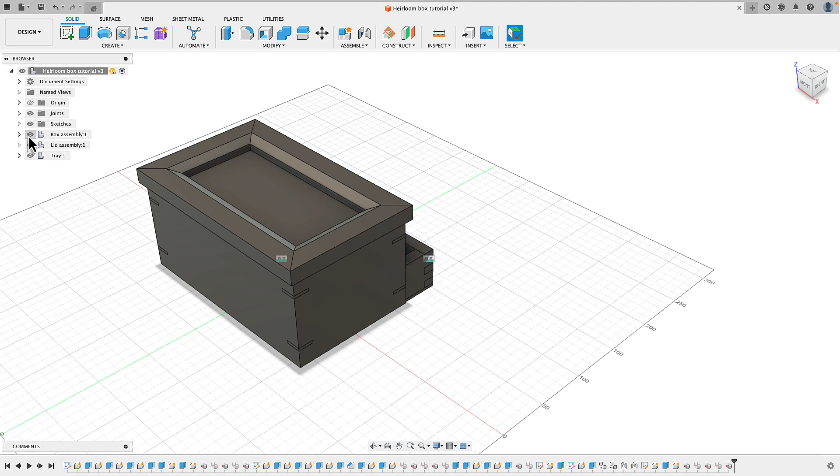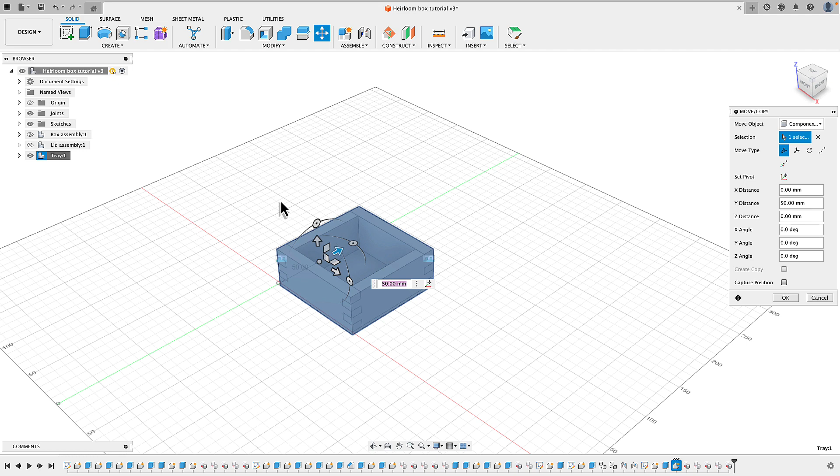So to make things easier, we'll just turn our box and our lid off. Generally a quick way of doing this, if we just select the assembly and then we can just move it. And we've got a little bit of a problem here. Normally that should be moving, but we might have a little bit of a problem with the way the joints are set up. So if you find that you can grab an arrow and it moves, you don't have this problem. But in any case, I'm just going to show you how to solve it if you do.

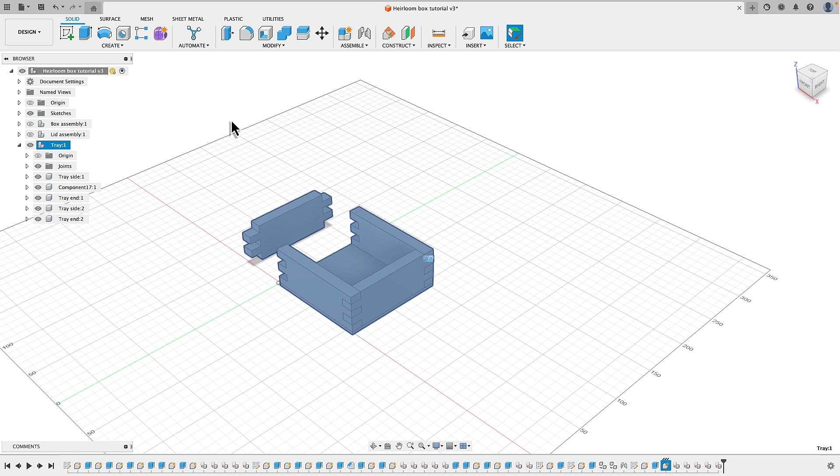So if we look at our tray subassembly, one of the joints, you can see it's this one here, is in our tray subassembly. But if we look up here to our master assembly, we can see that this other joint is up here. So probably to do it most easily, all we need to do is right click, we can just delete that joint and then select our tray, and we're just going to make that joint again. So keyboard shortcut letter J, and we can just come into that corner there, that corner there. Okay. And if we have a look, we can actually see now both of our joints are sitting inside our subassembly.

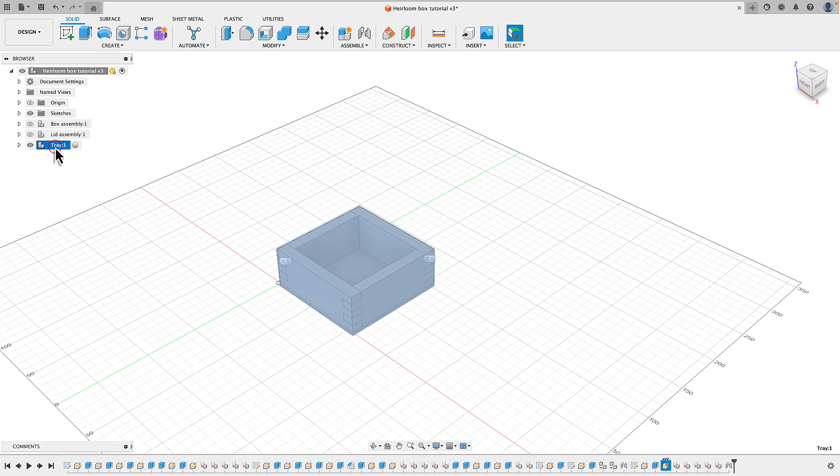So we'll close that up, select that, right click, move, and we're just going to move it out of the way a little bit. Okay. Then we can just turn everything else on, and we've got them separated for our next operation.

Up to this stage, whenever we've done any joining operations, we've been joining components to components. But now we're going to start joining subassemblies to subassemblies, and it just introduces a few things we've got to consider. And just to show you, I'll demonstrate what can happen.

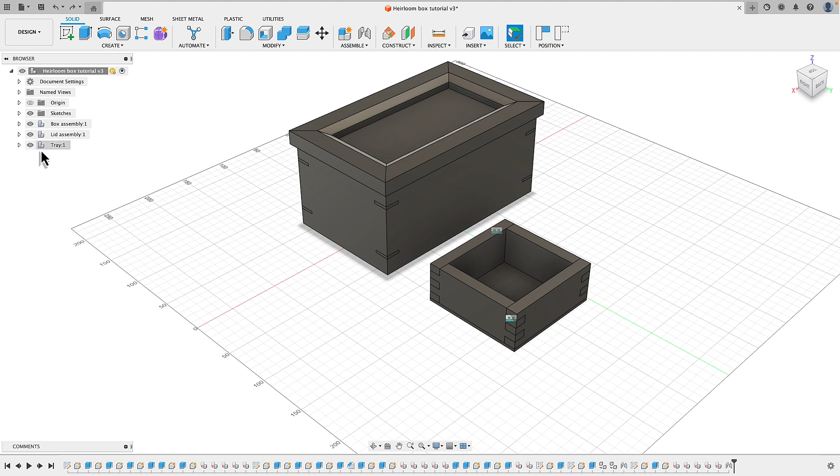So I'm just going to turn the lid assembly off because it's not relevant for this one. J for join, and I'm going to join this corner of the sliding tray to this corner of the box. Now if I press OK, you can see some funny things have happened there. So I'm just going to undo that and just show you another sort of step that we can undertake before we do that.

So the first thing we can do is we'll select the box assembly, right click on it, and we'll turn it into a rigid group. So it kind of will now treat this as all of these components being together. As you can see in the summary there, they're treated as a single object when moved or when joints are applied. So we'll turn that into a rigid group.

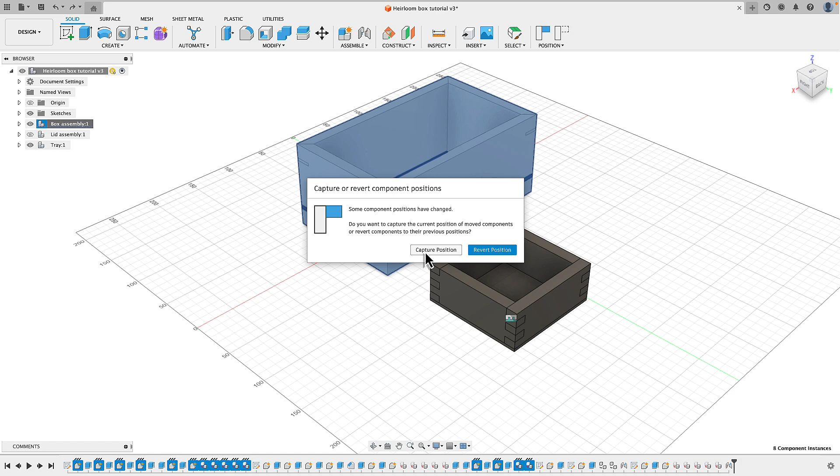You might get this warning here. In this case, we're happy with the position of everything, so we'll just go with capture position. And then we'll go OK. So same with the lid, we'll select it, right click, rigid group. OK. And then with the tray, same again, rigid group.

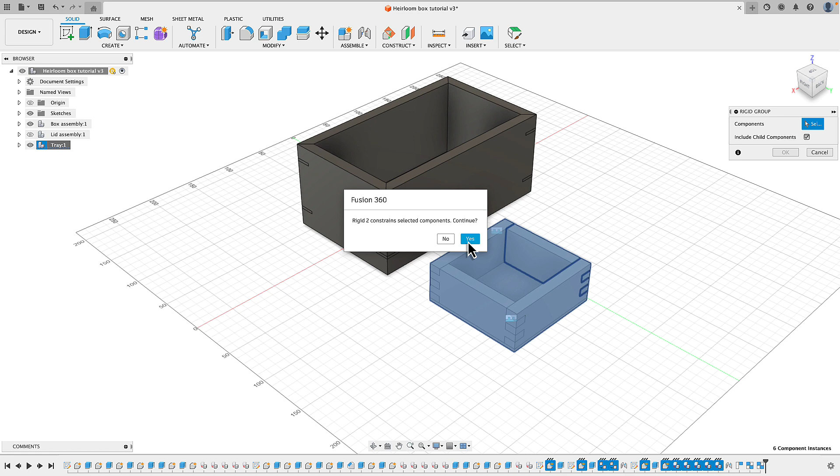Now because we've moved it, it might give us some warnings. So we'll just say yes there. And we're pretty happy now.

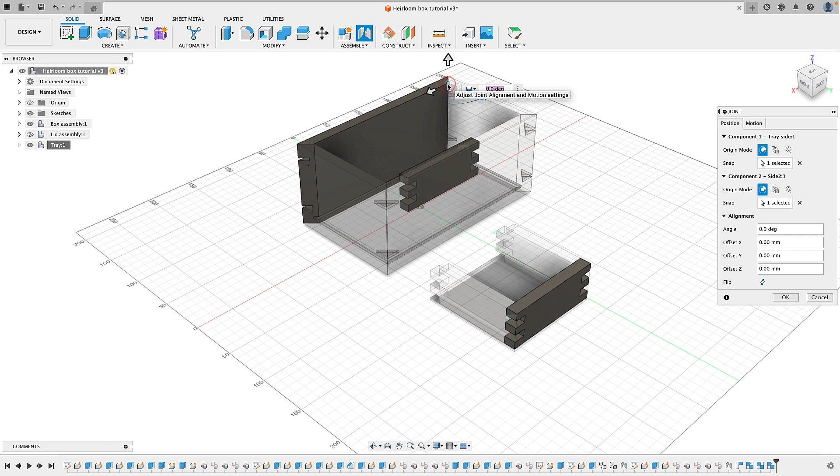So in terms of the joint, what we'll do is I'm going to start by creating a very simple joint, and then we're going to modify it later to animate it. So J for joint, I'm going to join, as before, this corner here to this corner here. Now you can see it's looking a little bit funny at the moment, but don't worry. And we'll go OK. So you can see everything's moved into that place there.

Before we modify the joint, we want to work out how far the sliding tray can actually slide. So we can use the inspect tool just to measure. So I just want to go from that corner of the box there down to this corner here, and you can see that that's 90 millimeters. So that gives us some information that's relevant.

Now to modify an existing joint, we can just select it. Now if you can't see that there, it might mean that joints is actually suppressed. So we can just select it, right click, edit the joint.

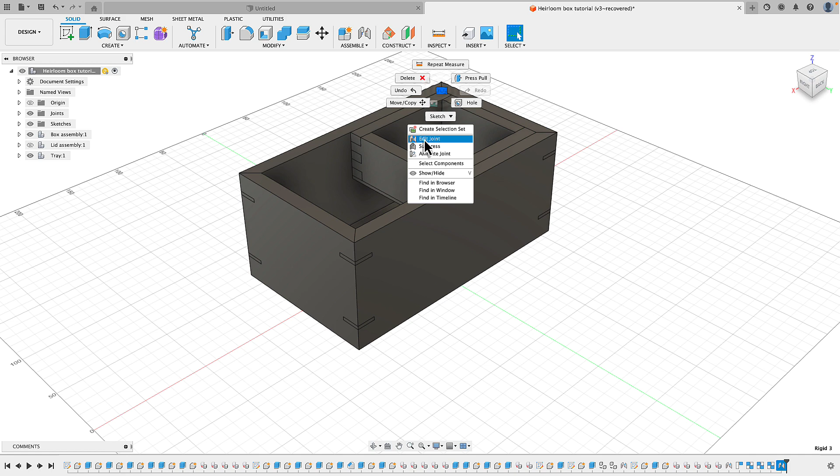So the first thing we want to do is set up the motion. The way we set it up the first time, it's a rigid joint, but we can select this and see the different kinds of joints available. We're going to have a slider joint because we want to slide a component along a single axis.

So we'll select that and you can see it's animating already, but it's going the wrong way because it's defaulting to the Z axis. So we can just check to make sure what axis we want. It looks like the X axis. Okay, so we've now got that.

Now in terms of motion limits, well that's our start point, so we'll have our minimum set to 0. But our maximum, we've already found that out, we'll set it to 90. And you can see that it's showing us where it's going to stop, which is exactly in the right spot. So now we can go OK.

So theoretically we should be able to slide this, but we've got a problem, and the problem is that nothing is grounded. So basically, because there is a joint relationship with the box, everything moves. So all we've got to do, and this is a pretty standard thing, is select the box assembly, right click on it, and we'll ground the box assembly.

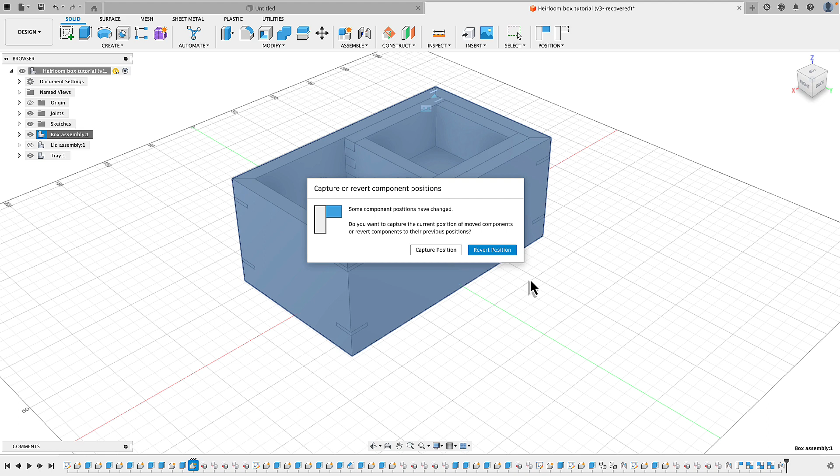Now we did move some things a little bit there, so we might as well go revert position. So we've gone exactly back to where we were. Now if I click away, and if I select any part of the tray, you can see that it slides up and down exactly where we want it to slide.

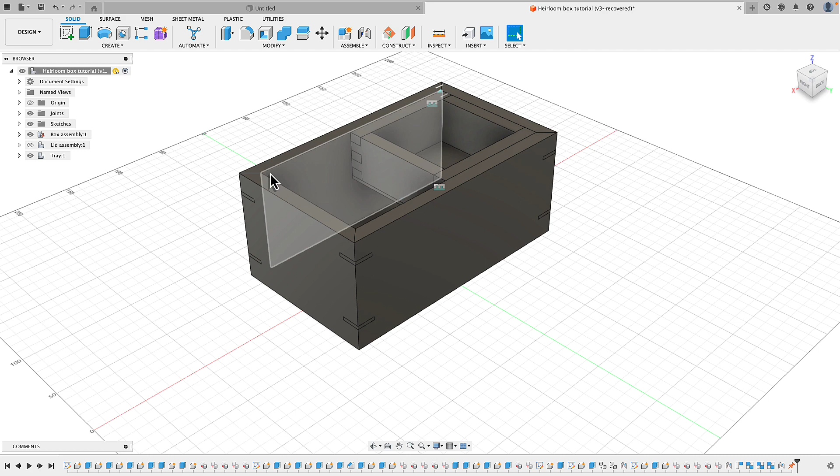Now we've got that done, there's just one other modification we need to make here. When I attach my lid, I'm not going to hinge it to the box. Basically what I'm going to do is on the underside of my lid, create a sleeve, or put an extra piece of material that has a thickness, but one that sits inside this space here.

But the problem is that it will interfere with the sliding tray, or the sliding tray will interfere with the sleeve. So all I have to do is, again, you can see the joint icon has changed because now it's showing that it's not a rigid mate, but it's actually a sliding joint.

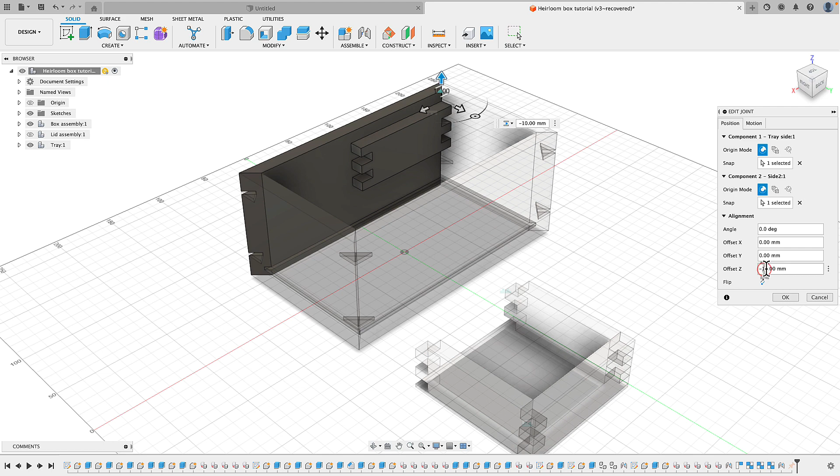So I'm just going to select it as we did before, right click, edit it. And the only other thing I'm going to do now is offset it on the Z axis. I could do some sort of variation up here, but what I'm going to do is down here, make that -3. And then OK. So you can see now it's set 3 millimeters down from the top. And as before, I can still slide it in that space.

Now you may have noticed that although we're nearly complete, we're not quite there yet. You can see we've got our nice sliding animation here, but the reality is that our sliding tray, there's nothing actually to support it. So in the real world, I get the students to create a little sleeve that just sits on the inside faces so that the tray actually has something to support it.

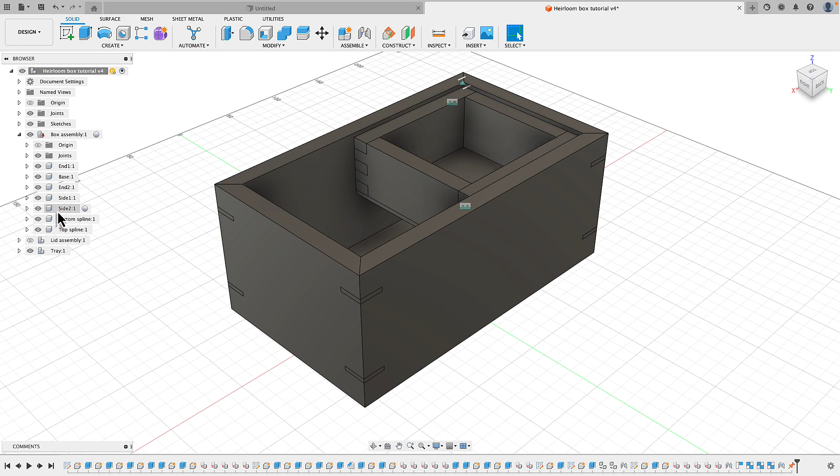So we'll create that now. Before we do, we'll start by hiding some things. We'll open up box assembly, and I just want to hide this side facing me because it gets in the way. Then we're going to use our inspect tool to measure, and we want to go from this bottom corner here of the sliding tray down to this line here and work out what that is.

So we've got 41 millimeters there, so we just need to remember that. Okay, so we'll keep hiding things. We'll hide our splines and our ends because they'll get in the way, and we might as well hide our tray as well.

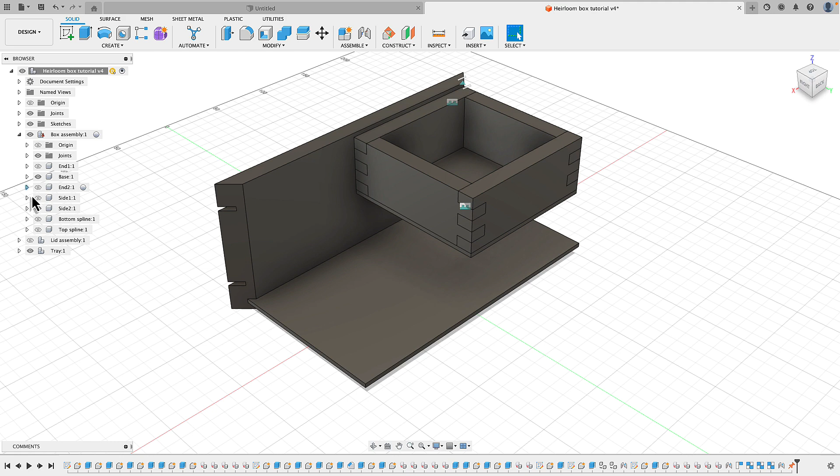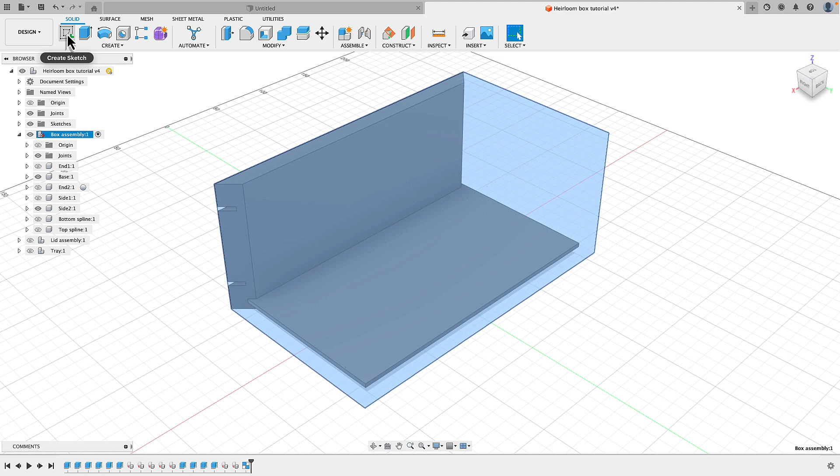So we're going to create a new sketch, and it's going to come off this face here. Now what I'll do, just so I can get everything in the right place, I'm going to select this box assembly here and press that particular setting to have this turned on. So new sketch, we're going to sketch off this inside face, R for rectangle, and I just need to go from that corner there and across. Now the bottom dimension of 196 millimeters is exactly what we want.

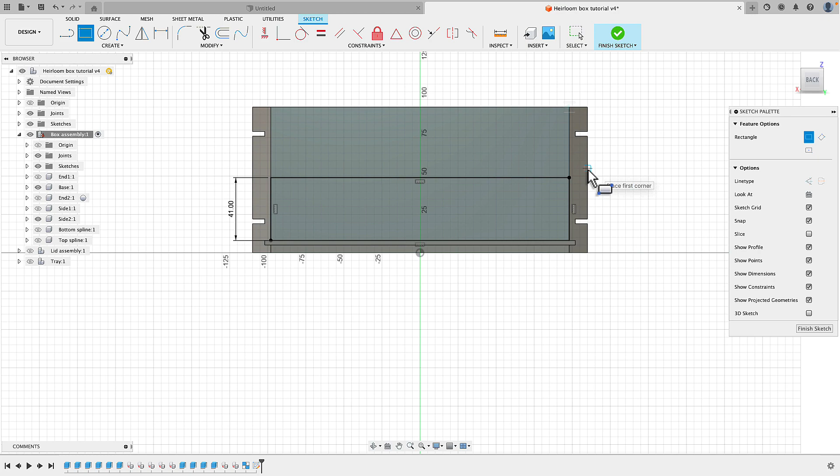It's this other dimension that we need to edit to 41, which is what we had before. Make sure that snaps to 196, and there we go. We can finish the sketch. So now we need to extrude it.

And so we'll come out this way. We need to come out 3 millimeters, and we need it to be a new component. And then we go OK. You can see the component has turned up down here in our box assembly. So we might as well give it a name, and we'll just call it tray support.

Now obviously we need another one. If you remember right back at the beginning when we first set this up, I started drawing it out using a center point rectangle. One of the benefits of it is we're going to see that right now because we're going to create a new tray support just by using the mirror function.

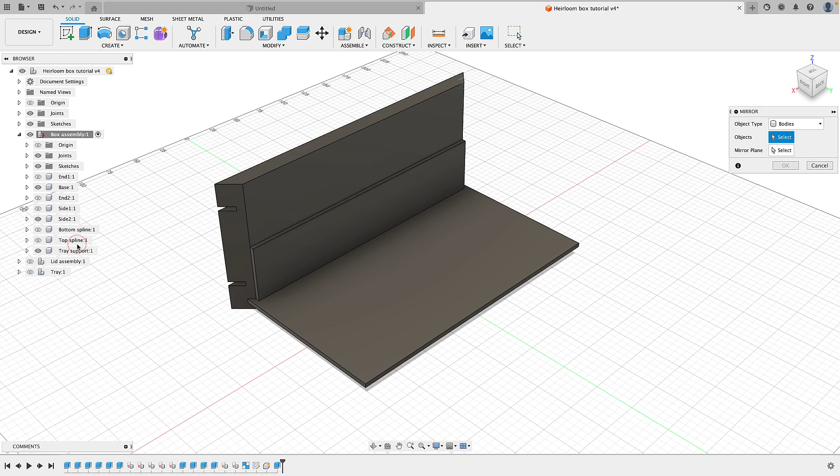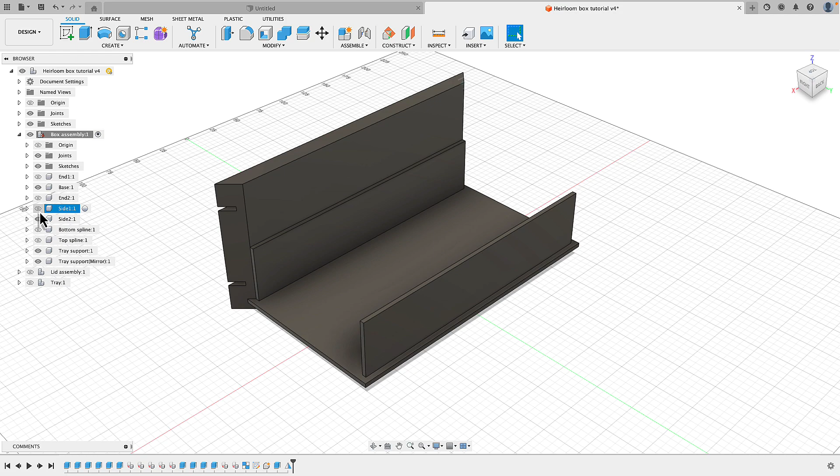So we'll go create, mirror. Object type is going to be components. We'll select that component, and our mirror plane is going to be one of our 3 original surfaces from our original origin here. So we've got that, and you can see that appears. We'll go OK. And then just to prove that it's worked, if I turn the other side on and orbit around, you can see it's in exactly the right place.

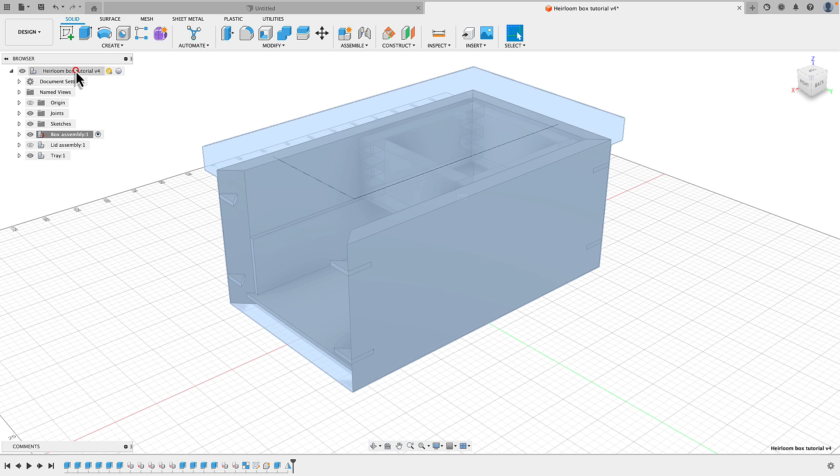Okay, so now we effectively have everything complete for our box. So we'll turn everything on, and we'll turn our tray on as well. We'll go back up and just have our overall project selected. Now we can just see that our tray is sliding on our little supports there.

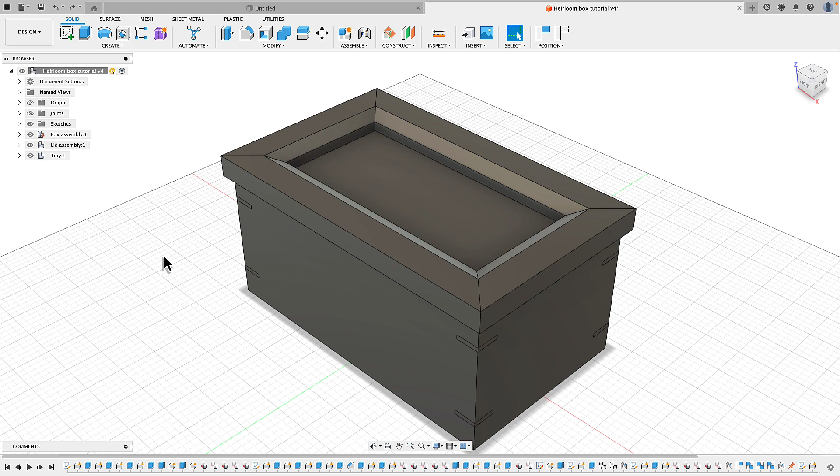One final thing before we finish this tutorial is I'm going to show you just how to make the box look a bit more realistic. So what we'll do is I'll select the box assembly and we'll open it up, and I'll just select the side facing us just to start off with. Now if I right click on that, you can see a couple of different features here.

You can add a physical material to it, and that's quite useful, particularly if you want to do any engineering functions, because not only does it make it look like that material, but it also assigns properties to it as well. Now in this case, it's not really necessary, so we can use the appearance function, and you'll see something like this come up over to the side.

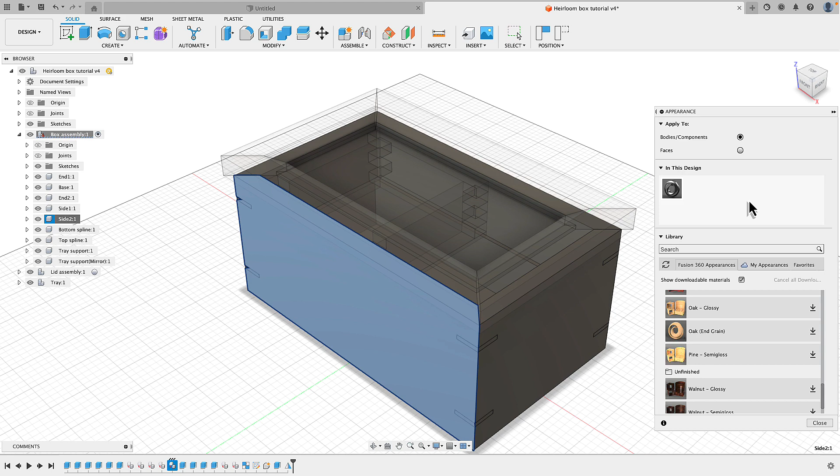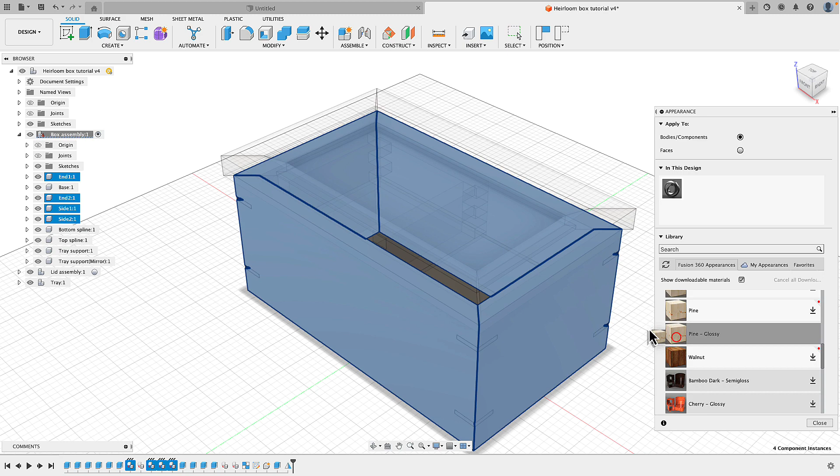But what I'm going to do is just select as well, for this one, everything that I'm going to give the same material to. In this case, it'll just be the sides of the box. I've already opened this up before, but you'll see this menu here, and at the bottom you'll see wood. So you can click on that, open it up, and I'll start off with maybe pine glossy, a good one. I'll select that, and I can just drag it onto the box, and you can see that appear there.

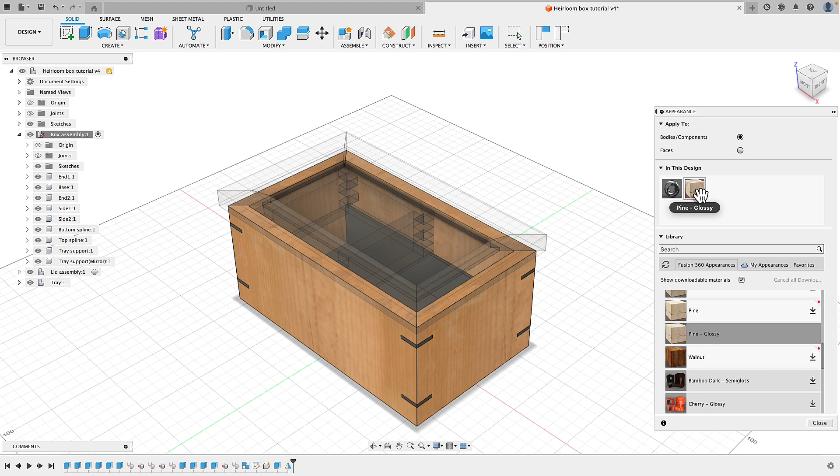Now you might look at that - there is something I don't particularly like, and that's the grain direction, because it's not realistic. In the real world, that's not the way the grain would go. So just to show you what you can do, if you then select it up here, because we've now dragged it onto our model, it'll appear up here. So if we select that, right click on it, edit it, this will come up.

Now the first thing that we can do is change the rotation, so we can fix that problem pretty much straight up. So there you go, now we've got the grain going the right way, and you can play around with some of these other features here.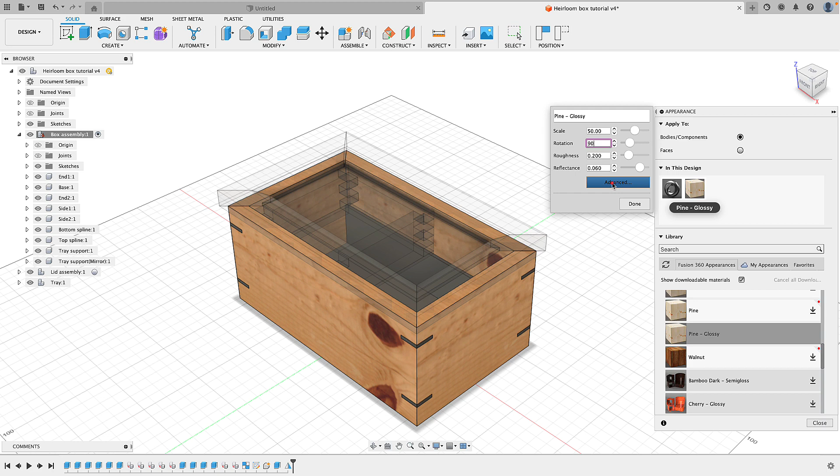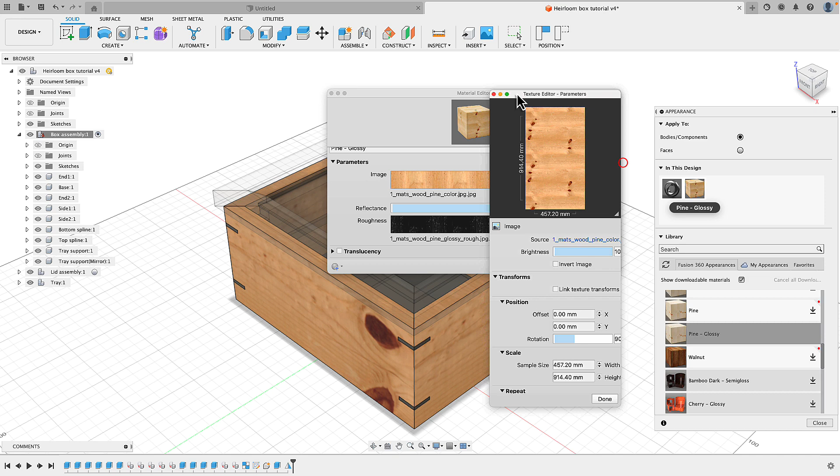But now what's happened is I've got these really big knots in my image, and I'm not a massive fan of that. So I can then go into advanced, and I'll just move this over and widen this out a bit. You can see we've got the image that comes in, and there's some other features here as well. But what I'm going to do is on the image, just hovering over here, I'm going to edit the image, and I'm going to play around - again, these menus don't really open up fully, but if I get in here, I can keep playing around with things.

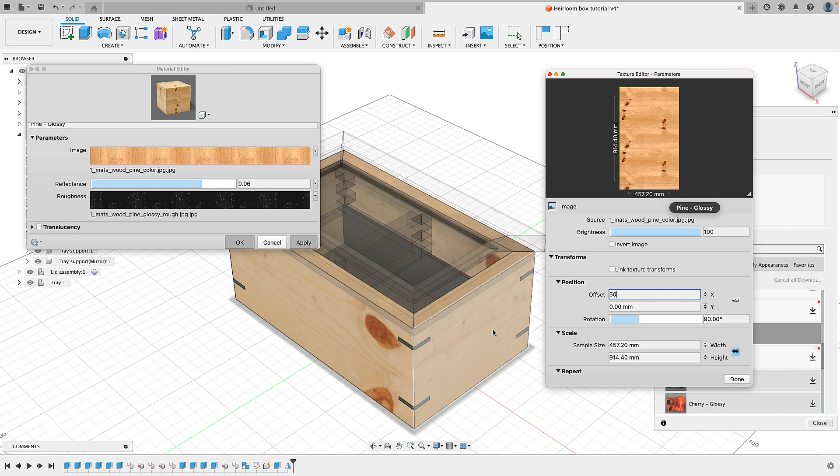So one of the things I want to do is move that there and that there so we can see what's going on at the box. I'm going to play around with this offset a little bit to see if I can get rid of those knots there. So I might offset by 50 millimeters and press enter, see what we get. Well, there we go - we've actually gotten rid of that. The other thing you can do is change the sample size so that it becomes a little bit more finely defined if you wish. But I just thought I'd show you that so you can play around with it.